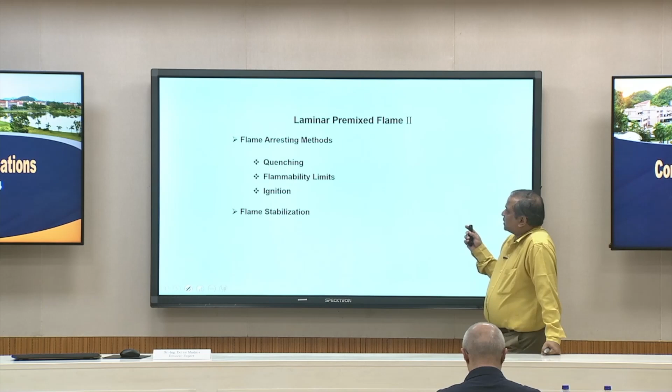Then in this lecture we will proceed further to bring out some other fundamental concepts that are of two categories: one is flame arresting, second is flame stabilization.

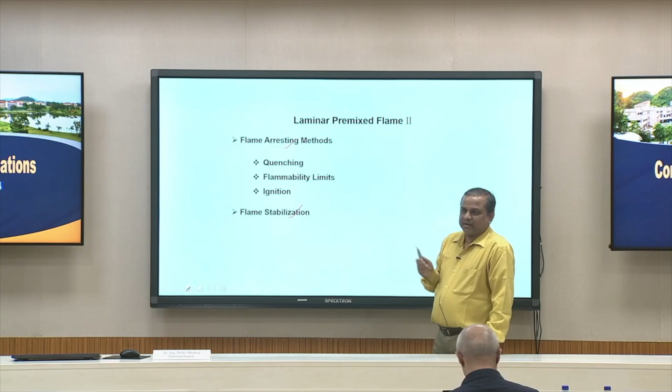In our previous lecture we emphasized that for a sustainable laminar flame we need favorable pressure and temperature conditions so that continuous combustion is possible. We demonstrated this with respect to IC engine combustion for premixed air fuel mixture, where for normal combustion we get a pressure trend as a function of time in a smooth manner. But when the favorable conditions are not there, we see pressure pulses and sudden oscillations when peak pressure is reached. This says that the flame is already at elevated pressure and temperature with sufficient strength, and it provides knocking.

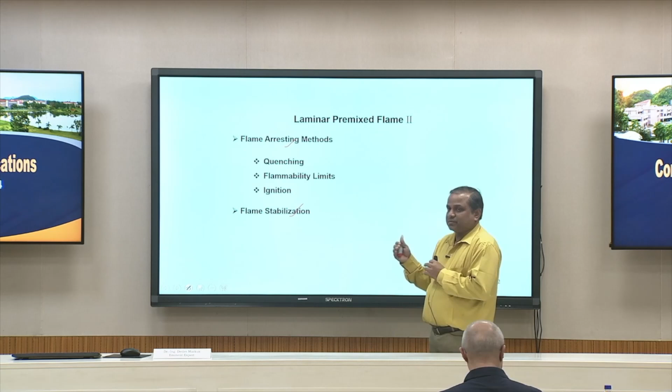At the same time, if we want to bring this situation back, we need other methods to avoid this knock through certain mechanisms in which the flame can be arrested. This flame arresting is not a typical phenomenon for engines, but the arresting method is very much required when you use laminar flame for certain applications like burners, cooking burners. This method is required so that the flame should not travel back or create a flashback, for which we need to arrest the flame. In other words, we must reduce its momentum to move backward. That is one aspect we require.

Second aspect is that for cooking type applications, burner applications, we require a continuous stabilized flame. As long as we are supplying air and fuel mixture with appropriate composition, we must get the flame. The flame should sit on the burner surface, it should not blow off - meaning it should not go above the burner - and at the same time it should not create any flashback. This condition we call flame stabilization.

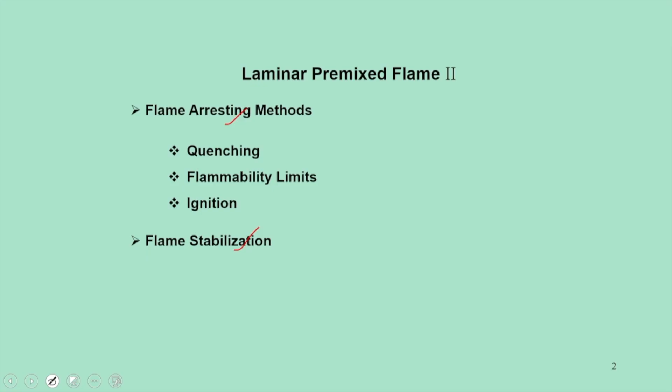So there are certain techniques this flame arresting method depends on. First, we should know the different criteria in which we generate the flame - particularly the kind of flame, such as in this SI engine case where the flame is propagating and you need to arrest it. So the arresting of the flame depends on the area in which this flame is moving.

Then the second method is that we can control flame propagation by changing the composition of the unburned fuel air mixture - this we discuss in terms of flammability limit. The first one we discuss in terms of the geometry in which the flame is propagating, which can be quantified by quenching distance. Another point is whether we can create a flame or not, which depends on how much energy or ignition we are dumping into the charge - this criterion is the minimum ignition energy required to create that flame.

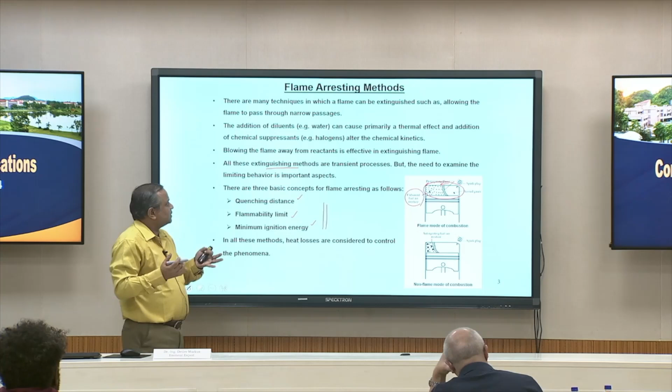That means we are giving sufficient strength to the flame so it can travel on its own. These are some of the methods we can think of. Second, in a classical way, we try to extinguish the flame - the extinguish method is simply dumping or cooling the flame through water. So when fire is burning, we dump water so it gets extinguished. In some cases we have fire extinguishers that can stop flame propagation.

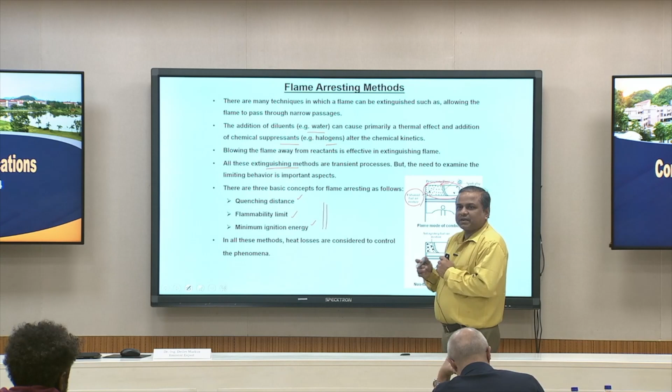Diluents such as water, chemical compositions, or fire extinguishers in the form of halogens can alter the chemical kinetics. So basically, in totality, the flame has to be extinguished under certain situations so that it cannot create explosions. In a layman sense, by creating these concepts, we are altering the chemical kinetics of the flame. These are the three basic methods we are going to discuss.

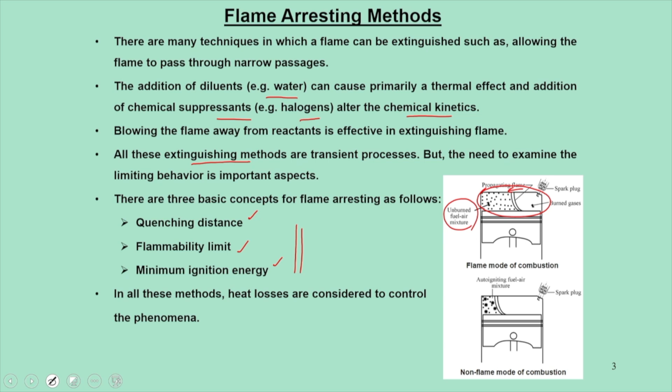The first thing we talk about is the term called quenching. This quenching term depends on a parameter called quenching distance.

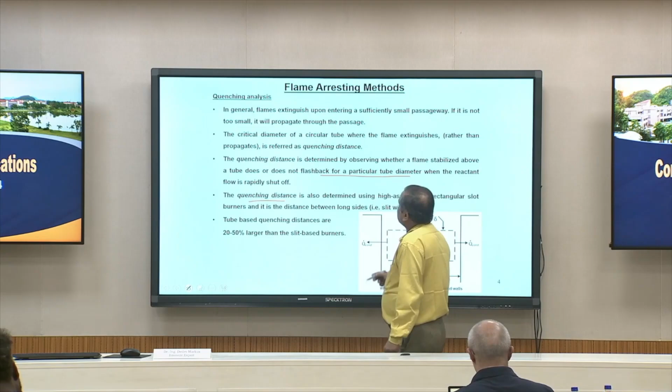This quenching distance is determined by observing the flame passing through a tube so that it does not flash back for a particular tube diameter. If you look at a flame passing between two parallel walls separated by a distance d, we can imagine there are two walls here, and the flame is moving up.

This dotted line shows a kind of wall in the vicinity of the flame, which we call an adiabatic wall. This slot has total energy entirely stored in the flame, and it is going up. As it goes up, it tries to bring the charge into it and get it combusted, so the flow moves.

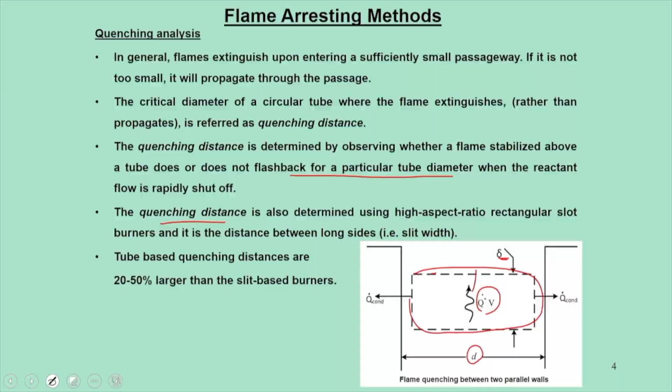So there are two parameters here. One is called delta, and the other is the parallel wall in which the flame is moving. There is a correlation between this delta and D.

There are two set of thumb rules which govern this ignition. First, ignition will occur if enough energy is added to the gas to heat the slab of a certain thickness, for a steadily propagating laminar flame, to adiabatic temperatures.

Once you put this minimum ignition energy, the heat liberated by these chemical reactions must be equal to the heat loss from this slab by thermal conduction. So whatever heat is generated, it is getting taken out by the slab in which it is moving—that's the wall.

Imagine this type of flame propagating in a combustion chamber of an engine—the chamber gets heated and requires cooling. In this perspective, the heat generated is getting consumed by this. If it doesn't get consumed, the strength goes up, and it has to be consumed, otherwise it will create a flashback.

In this philosophy, two parameters are taken into account. Suppose a flame enters a slot which is separated by a distance d, and we can define the adiabatic flame thickness, delta.

Adiabatic flame thickness delta means the flame is not getting cooled, and the entire energy sits within a certain vicinity of this wall—within that thickness, which is very short. That is called flame thickness. At this maximum adiabatic flame thickness, the flame has its maximum strength of heat within that volume, and this has to be extinguished if the flame is not to create a flashback.

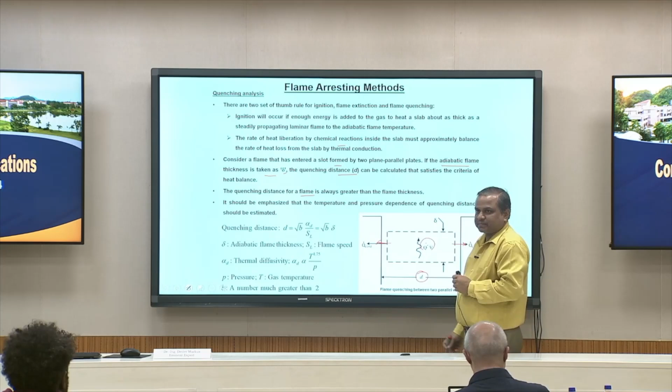For that reason, these walls should be placed at appropriate locations, and that distance we call the quenching distance—the minimum distance required so that the flame cannot traverse back. This quenching distance for the flame is always greater than the flame thickness; the distance should not be so small that it falls below the flame thickness. This flame quenching distance also depends on other parameters like pressure and temperature.

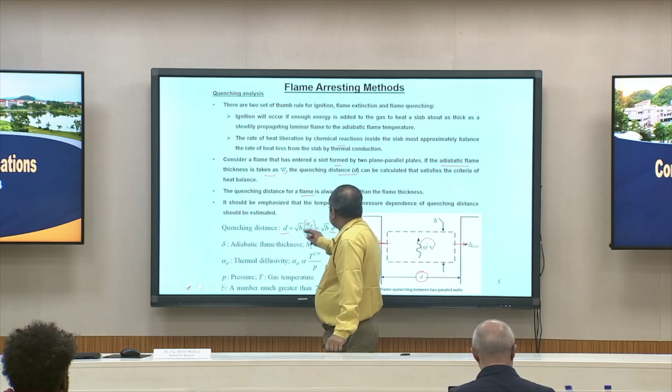Over the years, models have been developed to find a suitable correlation between the quenching distance d and the adiabatic flame thickness delta. We define two parameters: delta, and B, which is the square root of b. The correlation involves B times delta, where delta equals the thermal diffusivity divided by the flame speed. B is just a number used to adjust the correlation such that the quenching distance and delta match up. This thermal diffusivity is also dependent on pressure and temperature, and is proportional to T to the power 1.75 divided by P.

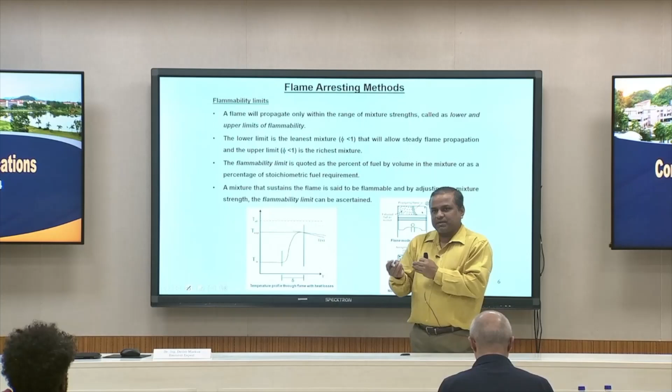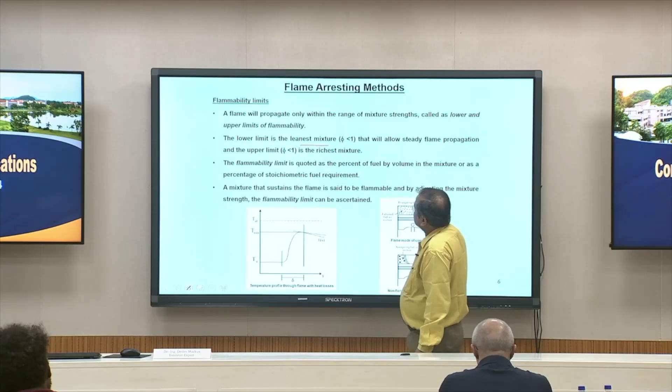The next point in flame arresting methods is the flammability limit. For every fuel, there are two limits within which combustion can be initiated. For IC engine operations, we define this in terms of equivalence ratio - engines normally operate between 0.8 to 1.2. That's the effective range from an engine point of view. But from a fuel point of view, it's possible to initiate combustion at much lower equivalence ratios, below 0.8, and also above 1.2. The flammability limits represent the minimum limit for the lean mixture and the maximum limit for the rich mixture. Above the maximum, the mixture is too fuel rich for combustion to be initiated, and below the minimum, it's too lean.

So that is the limit - we call this the flammability limit, typically written as phi minimum and phi maximum. So there are two ranges, minimum and maximum, and together these define the flammability limit. A mixture that sustains a flame is said to be flammable, defined by adjusting this flammability limit.

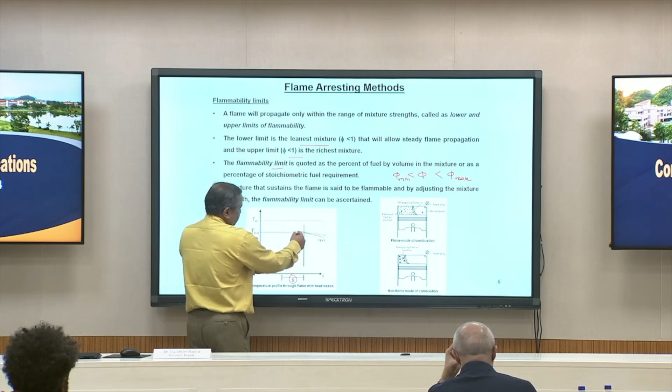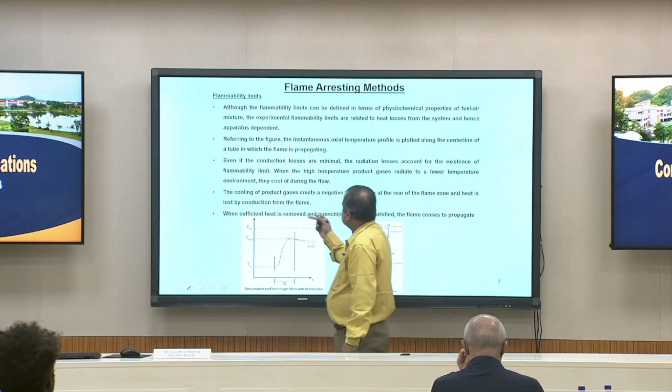Another important point is the instantaneous axial temperature rise along the central line of the tube. There could be possible conduction losses along the wall, and often the cooling effect of the product gases creates an adverse situation. Imagine a laminar premixed flame moving forward, consuming the charge.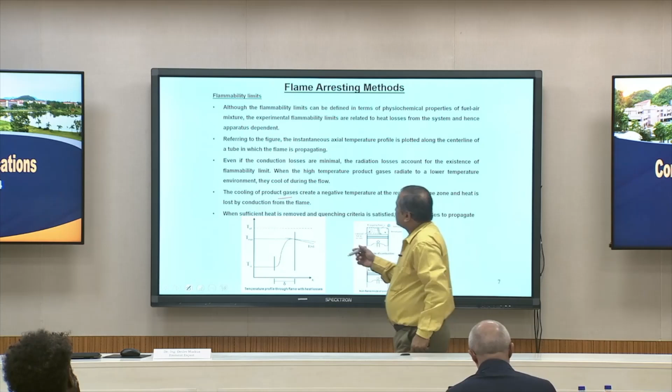Sometimes the temperature and pressure shoot up in such a way that atoms start to recombine - for example, nitrogen recombining with oxygen. During recombination, energy is absorbed, which has a negative effect: the flame gets cooled because the environment temperature drops due to the recombination of atoms among themselves. This is called cooling of product gases, which can create a negative temperature effect.

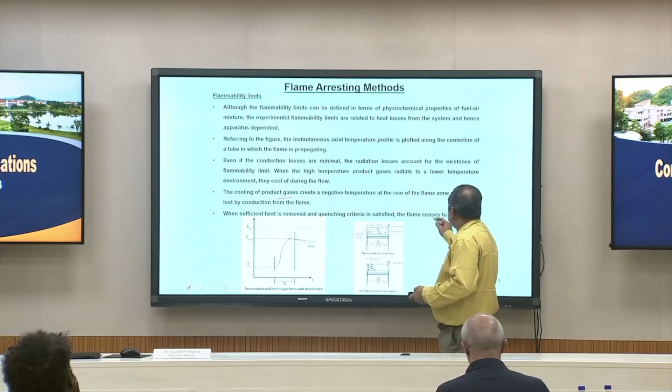When sufficient heat is removed and the quenching criteria is satisfied, the flame does not move further - it stops there. This means the flame is sufficiently cooled. In other words, we have arrested the flame.

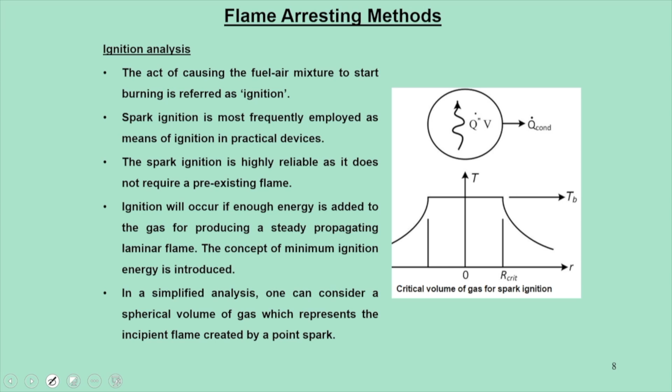The next category of analysis of flame arresting method is ignition. Ignition normally happens using a spark plug, which has certain dimensions of certain size or diameter. During spark ignition, we are creating a kind of flame, and one simplest way we can create is a spherical flame.

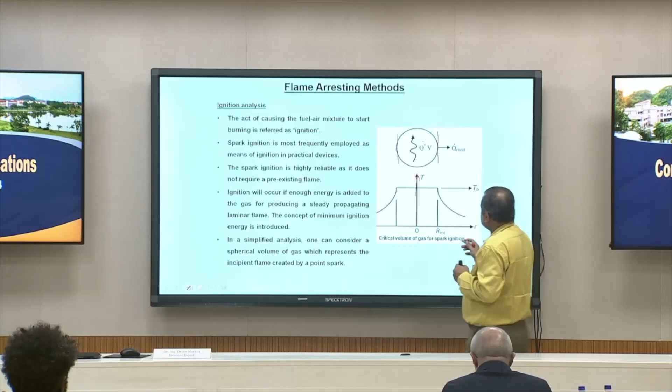We are dumping this energy through the spark plug, and for this spark plug has some diameter, through which whatever maximum size we can create for a spherical flame is based on its critical radius. This maximum diameter of this spherical flame is called the critical radius of the plug, or from the flame point of view, the maximum diameter of that spherical flame.

There are some correlations for how we can find out the critical radius of this gas volume. This is modeled in terms of a spherical flame, and it depends on what is the minimum ignition energy which is required by the plug. To get this, we require information about this critical radius for this gas volume.

This correlation says that this critical radius is the square root of 6 into alpha d by SL. Here alpha d again depends on many parameters, including the pressure parameter. This SL depends on the ratio of unburnt gas mixture and burnt gas mixture.

We have other terms which can be interpreted in terms of flame thickness, because alpha d by SL is delta. Through this we can find the critical radius for a gas volume as the flame thickness of this spherical layer of gas.

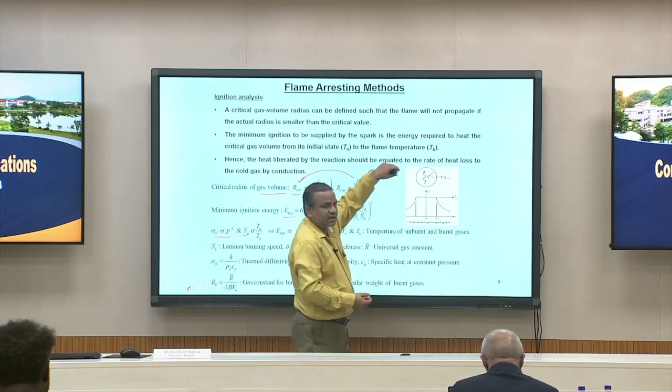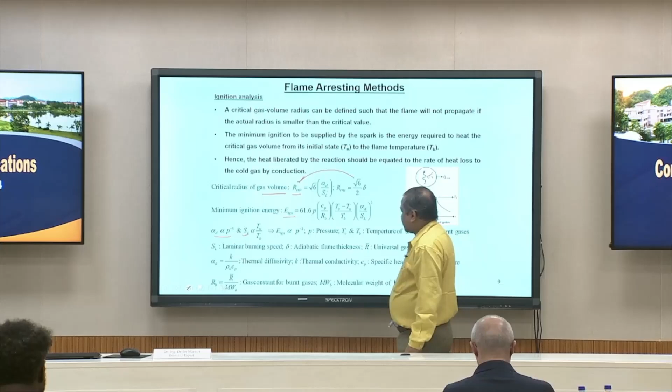Then we need to find the relation through which we can find out how much minimum ignition energy is required for a self-sustained moving flame. That depends on these numbers: pressure, thermal diffusivity, flame speed, temperature ratios, and so on. Here RB stands as the gas constant.

This RB is one parameter like Cp by RB. Cp stands as the specific heat at constant pressure, and RB stands as the gas constant for the burnt gas. This is calculated through ideal gas relations.

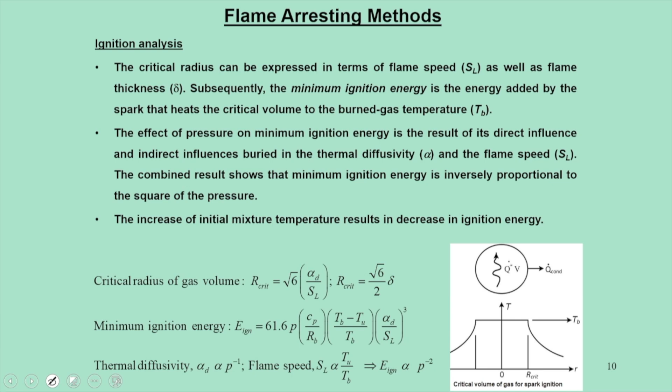Next we need to talk about this ignition analysis. I have already mentioned the effect of pressure on the minimum ignition energy is the result of direct influence and indirect influence in terms of thermal diffusivity and flame speed. So we can say this minimum ignition energy is inversely related to the square of pressure.

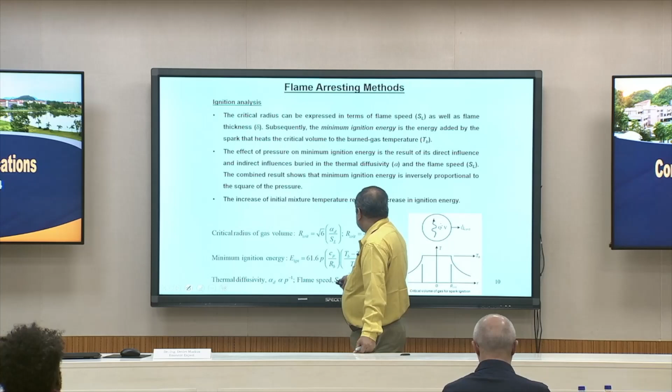If you actually see here, minimum ignition energy is a function of pressure, but the pressure is implicitly involved in the calculation of flame speed. This is because flame speed is a function of Tu by Tb, which means it also boils down to ignition energy being inversely related to pressure.

Then we will move on to the next segment, flame stabilization. In most combustion analysis, particularly cooking stoves, we require a self-sustained flame to remain, so that we can say the flame is sitting on the burner face. There are two phenomena that can occur if the flame is not stabilized.

First phenomenon is called flashback. Second phenomenon is flame lift off. These are the two critical aspects for flat burners or cooking burners. Flashback can occur when the flame enters and propagates through the burner without quenching. That means the flame doesn't see sufficient pressure difference to move forward, so it travels backward.

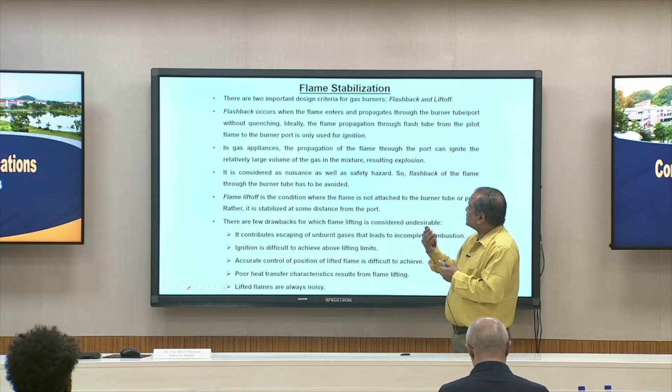The other option is through pressure difference. If the pressure difference is such that it doesn't have a minimum ignition energy, then if it has more than this minimum ignition energy, it travels back. Also, the large volume which is there in the mixture can also create this explosion, because when it flashes back, all of a sudden it sees the large volume of charge.

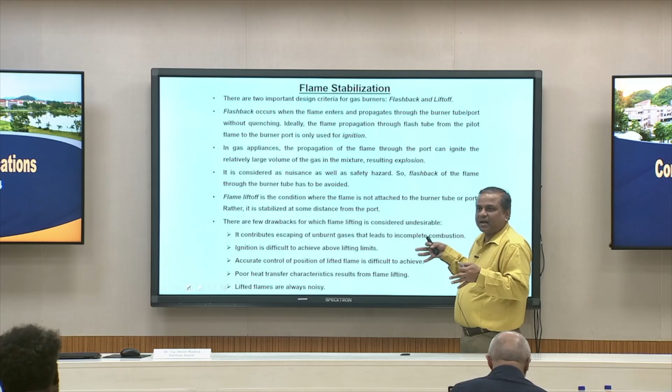Hence, this flashback has to be arrested. The other condition is what we call flame lift off.

This is a condition when the flame is not attached to the burner; it sits at a certain distance, and this is what we call the standoff distance. If this is your burner face and the flame is sitting at some height, that distance we call standoff distance or lift off height.

However, this lift off condition has to be avoided, because that is not a case for flame stabilization. Why? Because this lift off situation allows the unburned gases to escape, meaning we are underutilizing our charge. Although the flame lifts up to a certain distance, if it goes above that, it becomes difficult to create ignition.

That means ignition is difficult to achieve above the lifting limit. Accurate control of the position of the lifted flame is difficult to achieve, and through this lifted flame, we end up with poor heat transfer characteristics.

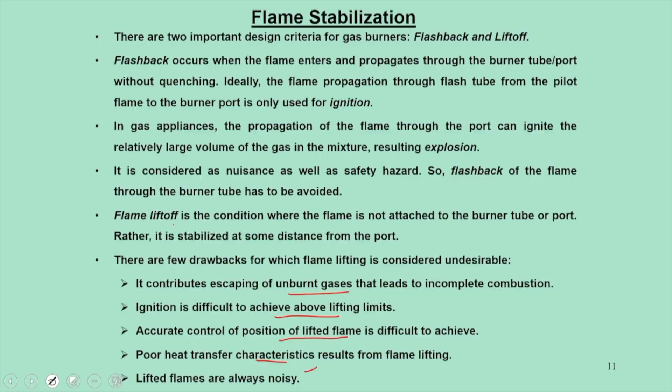And when we have lifted flames, they are always noisy. In conventional cooking burners, you might have experienced this: when the flame is lit, or suddenly we switch off the burner, an abrupt noise pops up, which means those cases are recalled as noisy situations.

Now let us talk about flame stabilization in terms of flashback. When you see this particular figure, we see that there is a burnt gas and the flame front is moving, and on this flame front we can define certain velocities at each particular point. At the same time, we can also see the gas velocity which is moving.

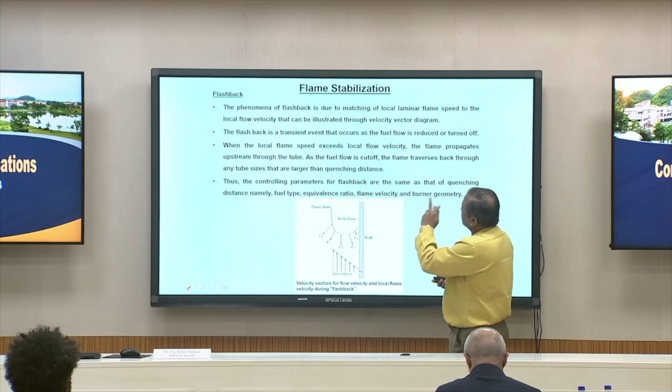When they interact, it creates the dominance of one over the other. If the dominance of the flame front is more, it suppresses the gas velocity, and if the gas velocity is higher, it pushes the flame. So due to relative dominance between these two, we get this flashback, and sometimes there could be a transient phenomenon which arises and settles down with time.

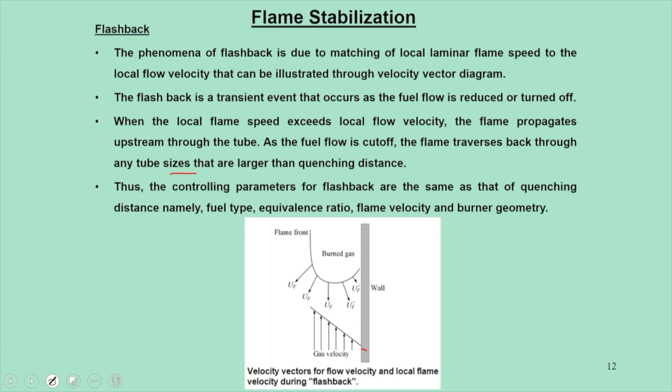It also depends on the tube size in which the flame is propagating. So the controlling parameters for this flashback are the same as fuel type, equivalence ratio, flame velocity, burner geometry, and so on.

This is another figure which talks about a case study, to give some trend of two types of flame, two types of fuels: one is a fossil fuel, methane, and the second one is hydrogen.

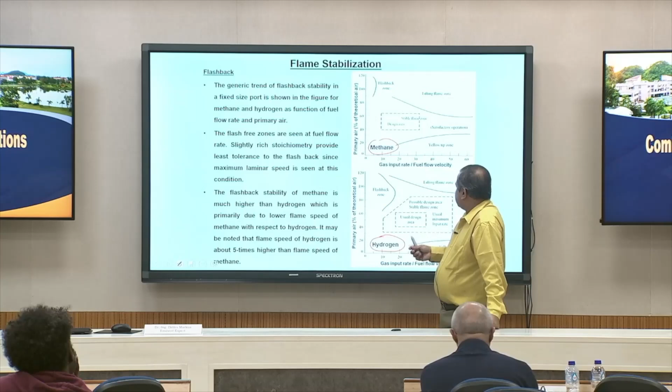The basic difference between these two cases is that hydrogen has a large flammability limit, whereas methane has a smaller flammability limit. In terms of equivalence ratio, there is a large window in which we can create ignition for hydrogen, but a small window for methane in terms of phi, equivalence ratio. Because of this, the flame speed of hydrogen is about 5 times faster than that of methane.

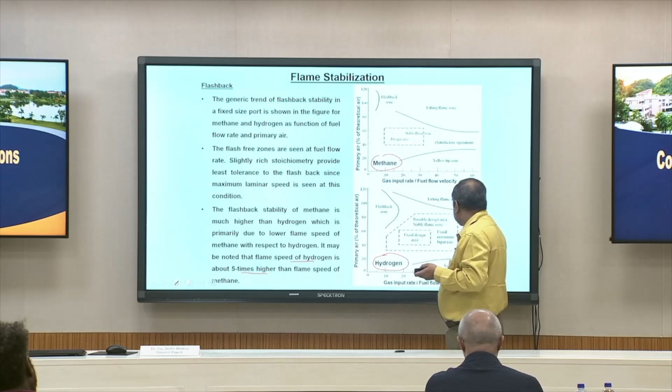This particular diagram is a generic plot, not quantitative. It talks about the gas input rate or fuel flow velocity with respect to primary air and fuel, and with respect to the percentage of theoretical air we consume.

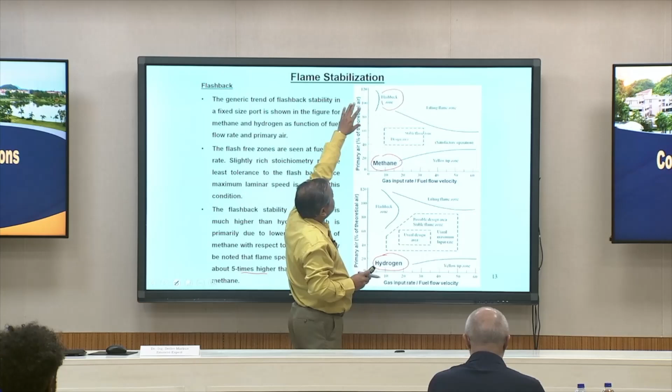If you follow their trends, for methane we have this flashback zone somewhere here, meaning for flashback to occur, our air requirement is very high, but fuel requirement is very low. That is the safe zone in which fossil fuels are operated, but that is not true for hydrogen.

Because the flashback zone can happen at any point with very small fuel flow input. At the same time, air requirement may be close to 60%, and air is anyway available for the charge. So a small quantity of fuel can lead to a flashback zone area, which is not possible when we use methane.

Now when we say that flame is getting lifted from the burner surface, we can find a trace through which, if you keep on increasing the gas input rate or fuel velocity rate, you will find that with increase in the fuel flow rate, the theoretical requirement is less. This number is somewhere within this 60%, whereas for hydrogen it is much higher.

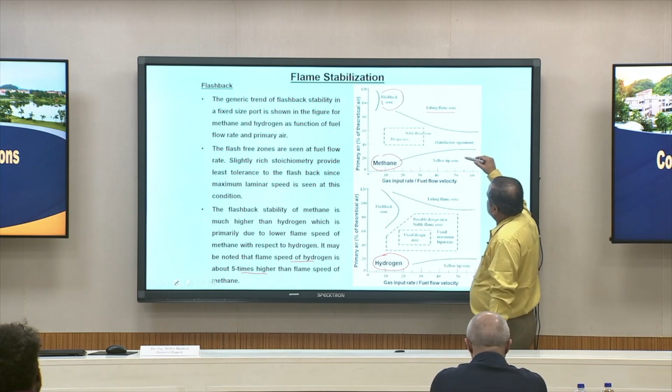Similarly, we have a lower regime in which the flame shows a different color, like we have yellow color here, and this is possible with 20% and here also close to 40%.

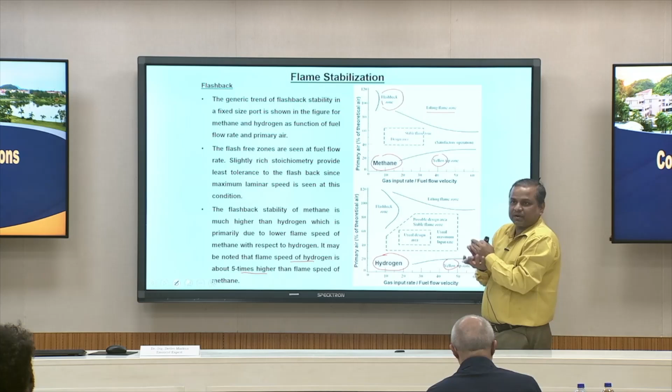So that way this gives you a domain in which we can design your area or geometrical area of that burner port. Here we have a large domain of design area for a stable flame, because that is what we require, and that is a standard domain. Here we will also have a very much larger domain than this for a stable flame. That means for hydrogen, the lifting zone requirement is higher, whereas for methane it is lower, which means we have a flexibility of larger burner area for hydrogen as compared to fossil fuel or methane.

So this is one kind of advantage, but however, maximum possible area for hydrogen we can define, but there are detrimental effects if the flashback zone is taken into account.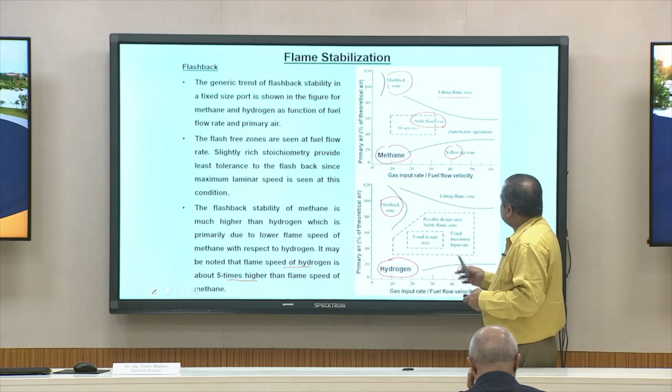In general, the basic summary is that whatever design area you choose for a stable flame, either for methane or hydrogen, the main intention is that it should have a flash-free zone during its operation. That is the requirement for a stable flame.

Now another situation I have emphasized here is that flame is tried to lift up. Why does it get lifted up? Because flame has sufficient strength. It does not get enough oxygen from the charge, and it gets oxygen from the diffusing air, which is outside the zone, which is atmosphere.

Assume that we have the burner face and flame gets lifted up, so there is a stand-off distance between them. Through this you have atmospheric air running into it and oxygen gets filled up, so the flame plume gets enough oxygen to lift it further.

But while lifting it further, if you see that at the same time you have gas velocity which is coming up, so they either try to diffuse or they try to get these things here. But if this flame plume lifts up beyond a certain limit, then the input charge gets diffused outside without getting ignited, because the flame plume has already traveled further and the energy is not in the vicinity of the surface, it is somewhere outside.

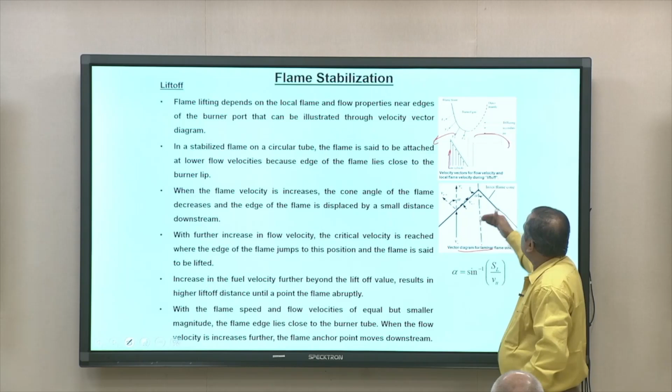So that way, if you look at the velocity diagram of laminar flame, this alpha changes. So alpha is no longer one particular thing, this condition has to be satisfied between unburnt gas velocity Vu and the laminar flame velocity Sl. So they don't match, which means the flame gets lifted up.

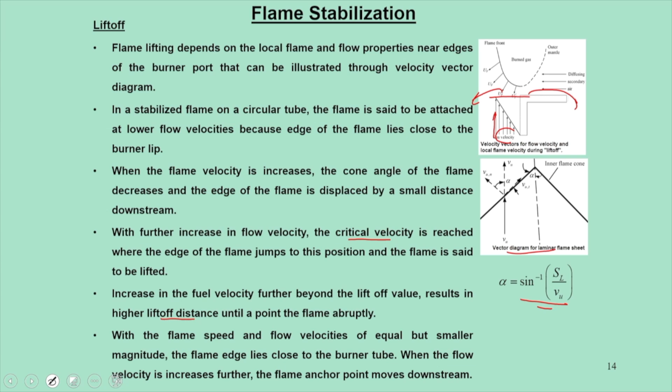So there is a critical velocity at which flame gets lifted up, and when it crosses this critical velocity, we will have a higher vertical flame lift-off distance, and the flame goes beyond this burner surface.

So this I have already explained, but the phenomena of lift-off or blow-off, that I need to emphasize. So lift-off, I told you, is that flame is getting lifted from this burner and sitting somewhere. So that is the lift-off.

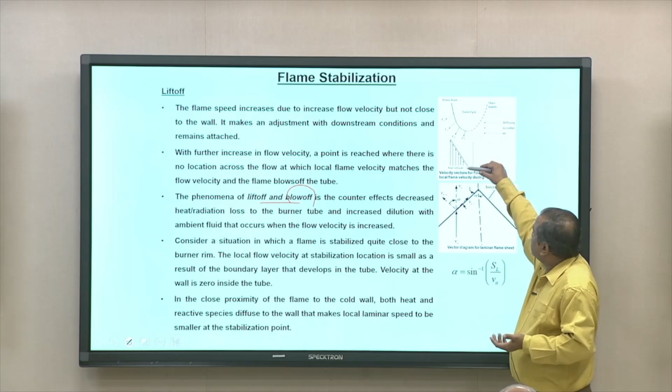There is a situation called blow-off. Blow-off means that the gas velocity at one particular time does not see the flame in its vicinity. That means the input charge velocity doesn't see it in its vicinity, and so it could not be ignited. So when it doesn't get ignited, but it has sufficient momentum to push the flame, it can push the flame, but it cannot ignite on its own. So that way we say the flame blow-off condition is achieved.

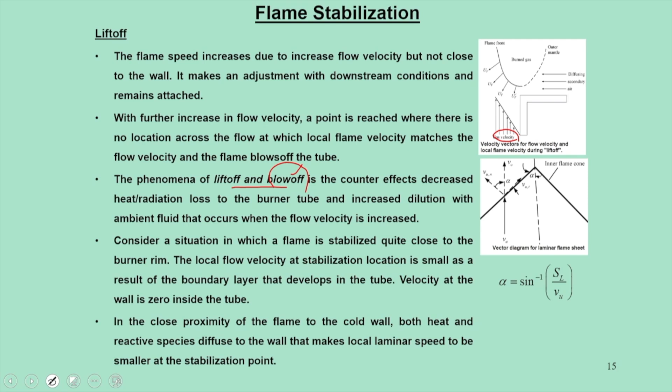Now in heat transfer point of view, we say that this is a counter effect, for which heat or radiation loss occurs to the burner tube. So this view is analyzed, the heat or radiation loss.

So ultimately this leads to a conclusion for methane and hydrogen, that the lift-up operation for the flame varies as a function of primary air flow velocity, and methane flame is more prone towards lifting as compared to hydrogen.

That is also true, because hydrogen has very high flammability limit, a wide range of flammability limit, and of course hydrogen has a higher flame speed.

So this is all I need to discuss with respect to the laminar flame analysis. At the end of this lecture, I will emphasize some numerical problems which highlight a flat flame sitting on a burner, which we need to calculate, and one case study done for a methane-air mixture.

The condition the burner operates at is 310 Kelvin and 6 atmosphere, and we need to find out what is the condition for flashback, and what is the mixture mass flow rate. That means you need to design this burner, to find out the burner size and so on.

So first, we need to find for methane-air mixture what is the mass fraction of air and the mass fraction for fuel, and we need to find out also the density of the unburnt gas mixture to obtain this mass flux.

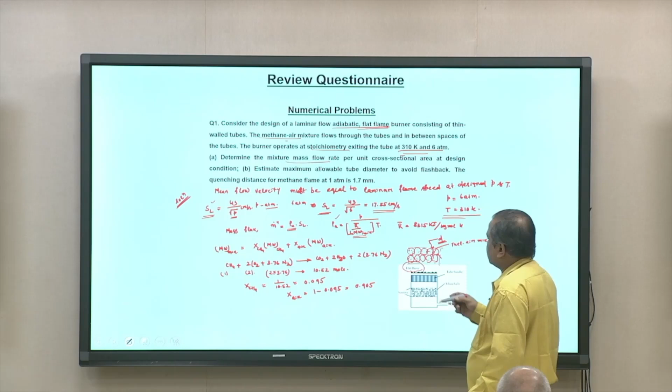For this, you can use the dependence of flame speed as a function of pressure, and using this one can find out these things one by one. First is what is the mass flux, second...

how we can find out the diameter ratio, which talks about the conditions when we have a non-lifting case, and other when the flame has to sit on this burner surface.

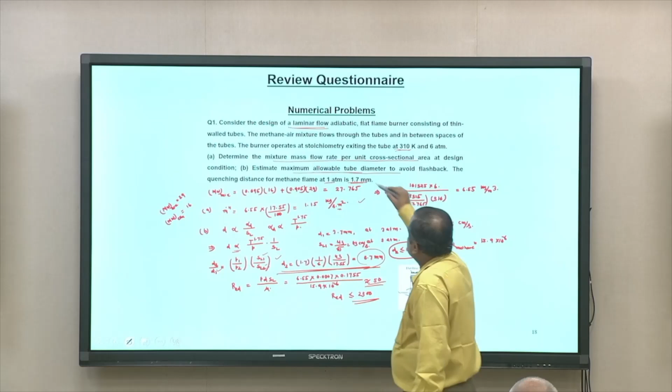The other case is what is the maximum distance it can sit on this, which will give you the allowable tube diameter. Then another important problem...

that talks about the importance of flammability limit. For example, this considers a corner of a room, in a cylinder, where propane gas leaks, and whether that leak can create an adverse situation or not.

To find this, what we need to know first is, from the data table, what is the minimum and maximum flammability limit for propane. This we obtain from data.

Now for these particular conditions, what is the value of phi we need to find out. In this case, you are given the size of the room, mass, and temperature. We can use ideal gas relations to find the pressure, and of course we have atmospheric pressure.

Through this we can find out the mole fraction for the fuel, and here the fuel is propane. Once you know the mole fraction, correspondingly we can find out the air-fuel ratio. So this is how we get the air-fuel ratio for this particular case.

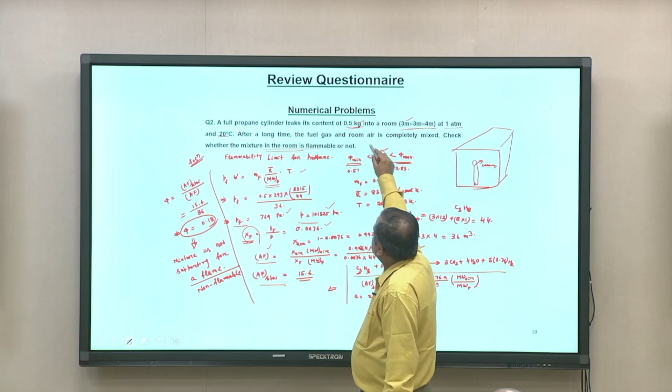Now again, for the propane-air mixture, if you look at the balanced equation or complete combustion equation, we can find the corresponding stoichiometric value, and for this case the stoichiometric value happens to be 15.6. So through this we can get the actual air-fuel ratio and the stoichiometric air-fuel ratio.

From this we can find out what is the equivalence ratio for this fuel which is getting leaked. That means this mixture, when it is leaking and mixing with air, has an equivalence ratio of 0.18.

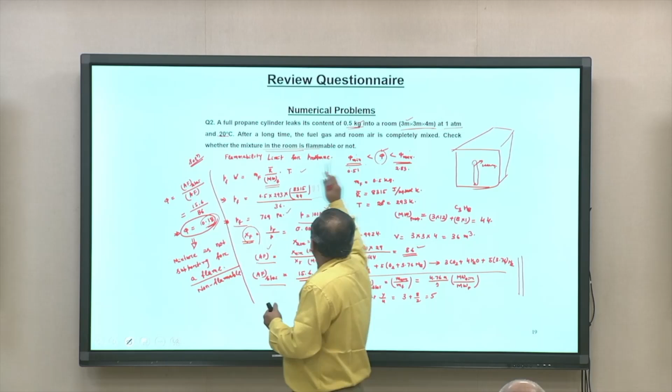Then you have to cross check whether it falls within that flammability limit or not. In this particular case, the mixture does not support the flame, so this leak cannot initiate a flame.

When it cannot initiate a flame, we can say it does not have a detrimental or adverse effect, and it does not lead to any kind of explosion.

Sometimes also in our conventional cooking burners, we feel there is a leak through smelling, but that leak does not lead to explosion because it is below the lower flammability limit.

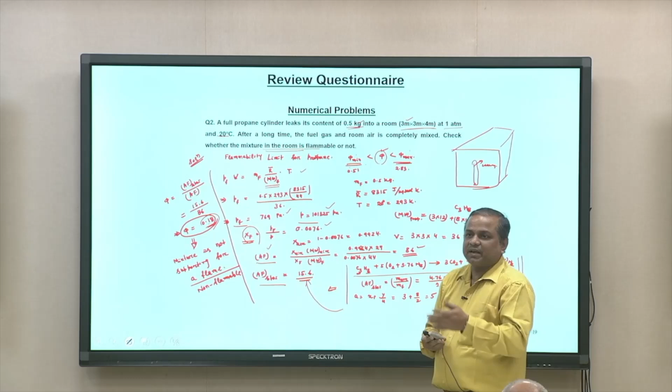And when it crosses into the higher flammability limit, it can create adverse situations. So this is all I needed to discuss for today. Thank you.